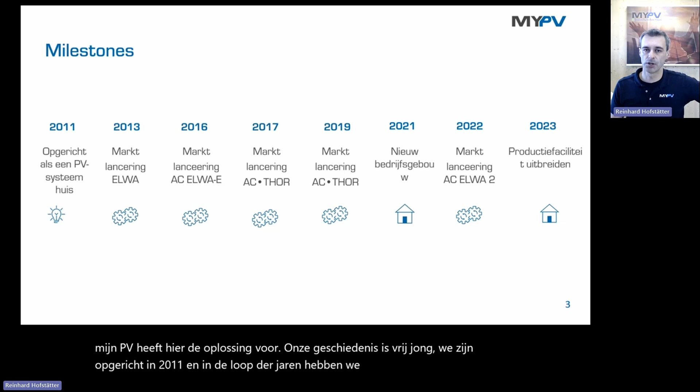Our history is pretty young. We were founded in 2011, and over the years we have developed a number of different solutions. It all began with a DC solution named ELWA. The abbreviation just means electric water heater, and still until today it's in our portfolio with hardly any changes on the product itself. It's a DC solution, and it's the only DC solution we have.

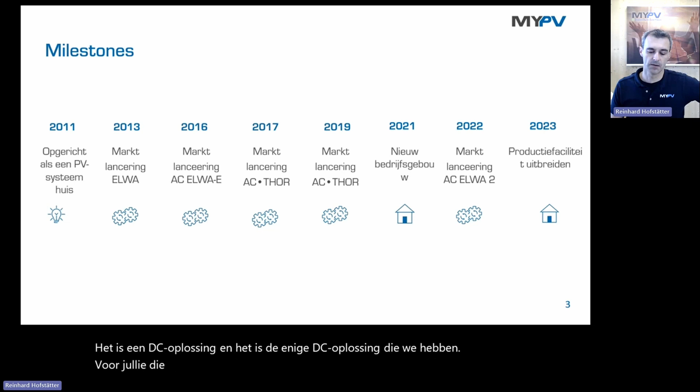For you guys working with SMA home manager systems, it's relevant what we have in our portfolio to be combined with AC power systems. And there are several solutions. At this point today, we are talking about 2 variants that can be combined with SMA.

This is our headquarter in Austria. We built it in the year 2021. During the last 2 years, it's already too small again, so we expand our production area by a factor of 3 this year to meet the demand of the market, because power to heat for residential applications has become very important, especially since the war in Ukraine.

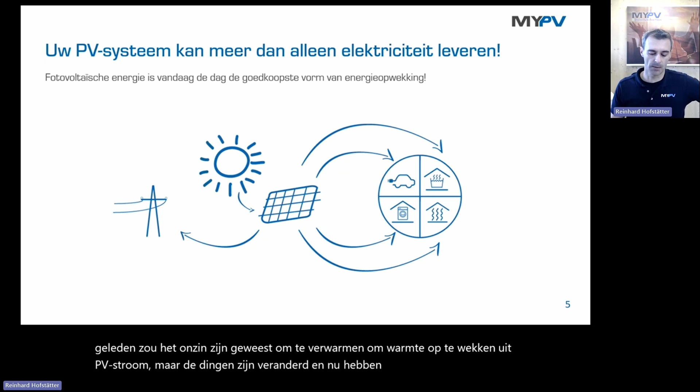What we are doing is possible due to the fact that PV has become that cheap. 10 years ago, it would have been nonsense to create heat from PV power, but things have changed. And now we are talking about power to heat or sector coupling, and there are several words that are in use for what we do.

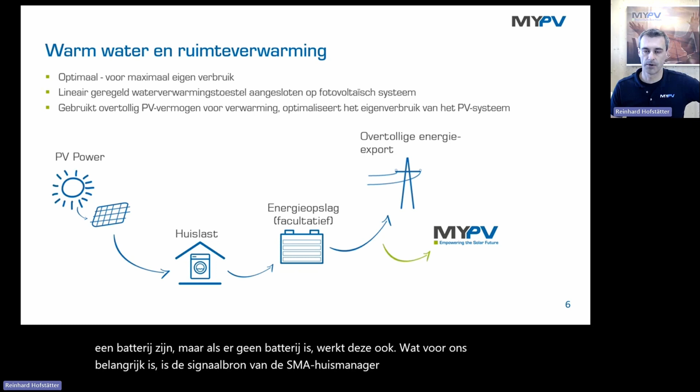What power do we need when we are talking about the combination with SMA in on-grid systems? It's all about the excessive power, so we utilize the power that would be fed back into the power grid. There can be a battery, but if there is no battery, it works as well. What is important for us is the signal source of the SMA home manager, or alternatively, the SMA energy meter. Both things are possible, each variant has its advantages.

Let's take a short look and talk about storage capacities. When we are installing a stationary battery system in a residential building, the capacity is around 5 to 10 kilowatt hours, and this means an investment for the people. Alternatively, we can use the hot water boiler which is already in the building, and we can make use of this boiler for increasing the self-consumption by a MyPV solution.

So we can be both. We can be a cheap alternative to a stationary battery, but we do not compete with stationary battery, it can be used in combination as well. And that's the cool thing about the combination with Home Manager - you choose whether there is a battery or not, for us it does not make any difference.

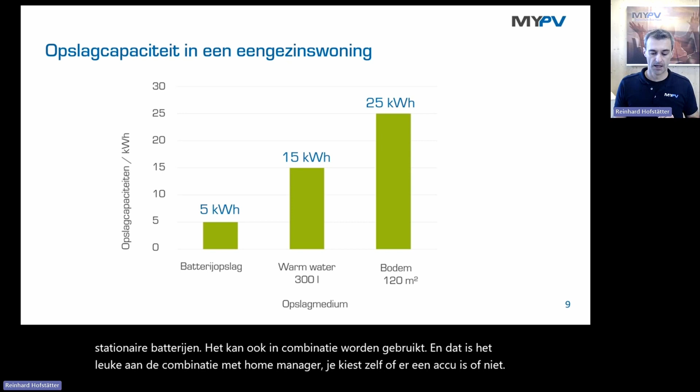There are three main products in our portfolio. This one at the top here is ELWA, which is the DC solution, it has no direct relevance for SMA. So we continue talking about our on-grid AC solutions, which means AC ELWA 2 and AC THOR.

What is the difference? Both solutions are power stages, both have the electronics to adjust the power output on an electric heating element. The advantage of AC ELWA 2 is that the heating rod, the immersion heater which is inside either the hot water boiler or the storage tank, comes with the device in the box. So it's an all-in solution, a combined solution, and it's very attractive when you make an offer to the customer because you have an all-in-one solution. Advantage of AC THOR is that there is not an immersion heater included, which makes you much more flexible.

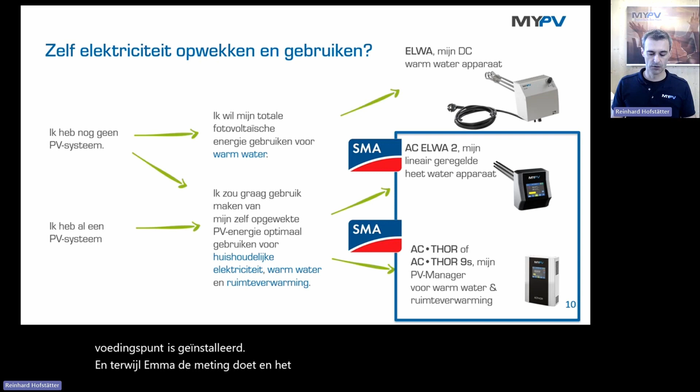You can retrofit an existing immersion heater with AC THOR, and then it's PV ready later on. Both devices get the commands, the orders of what to do and how much power needs to be released to the water from SMA. So you save on an additional device from MyPV, which is an energy meter that we normally install in the feed-in point. You don't need this device because SMA is installed in the feed-in point, and SMA does the metering and detects the excessive power, which is what we need to adjust the power output.

So when you are on the grid, you have two options. You can use it with SMA Home Manager or with SMA Energy Meter. With SMA Energy Meter, you have just one option to control our device: we directly get the meter value from the energy meter and adjust the power output accordingly.

When we are connected to Home Manager, you have two options. Either the energy management of MyPV is done by the Home Manager, or we do it the other way: we get the meter value from the SMA Home Manager, and then we do the energy management of the heater by MyPV ourselves. Otherwise, it's done by Home Manager.

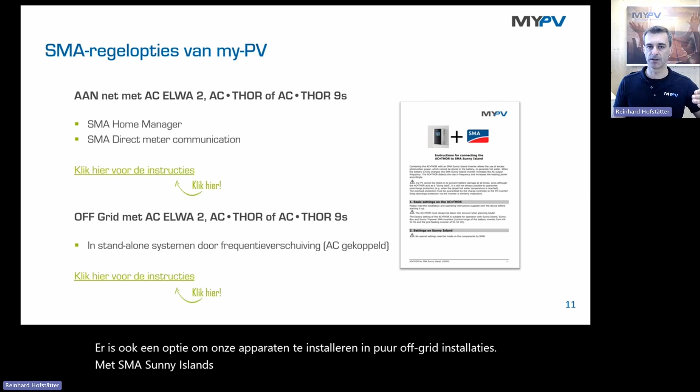There is also an option to install our devices in purely off-grid installations with SMA Sunny Island systems. It is possible to give the power set point to MyPV by the AC frequency. This is a very special application. We're not going to talk any longer about this, but it's a very cool feature for off-grid systems.

Back to the on-grid systems, this is what I meant before. When we are controlled by the SMA Home Manager, the logic, the intelligence is within the SMA Home Manager. We are just doing what SMA tells us to do. When we get the meter value instead, the logic is on our side.

Both variants have their advantages. When we are controlled by SMA Home Manager, the advantage is that we are within the Home Manager's energy management. We are also shown in the charts of the SMA portal. This is a very cool advantage.

The advantage of direct meter communication is that we adjust the power output much faster. Once a second we adjust the power output, very fast and very accurate. So both variants are widely used.

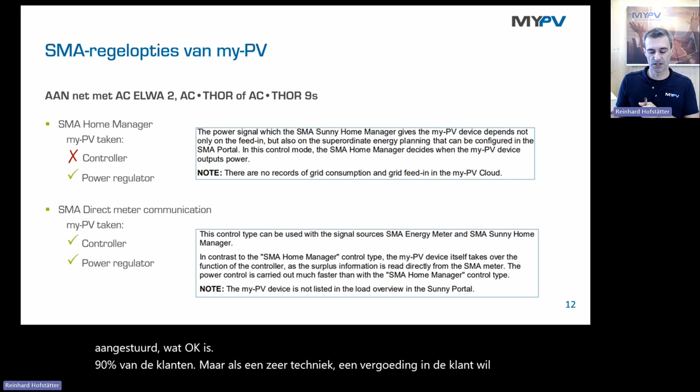It's up to the operator, the owner of the system, to choose whether he wants to be visualized in the SMA Home Manager, where we are controlled once per minute, which is okay for 90% of customers. But if a very tech-affine customer wants very fast power control, he changes over to SMA direct meter communication. Both variants are very well proven and in use out there.

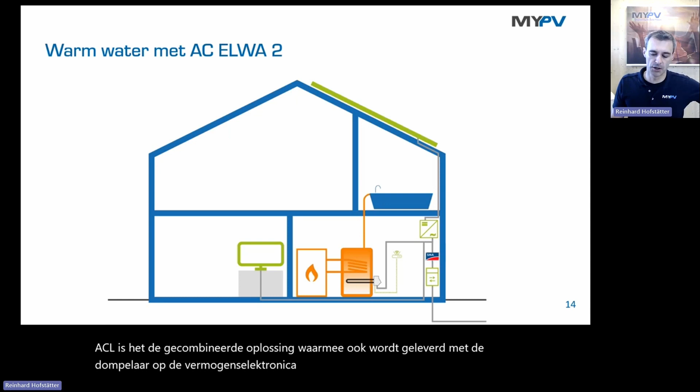AC ELWA 2 is the combined solution, which also comes with the immersion heater on the power electronics. Again, the signal source is SMA, either the Home Manager or the energy meter installed in the feed-in point. Depending on the control variant you choose, we are working fast or very fast.

So why is it so important to adjust the power output here on the immersion heater? Actually, you have two things that are changing all the time. Number one, the power output of the inverter changes all the time—the irradiation of the sun is not constant and clouds are moving across the sky. The other thing that changes permanently are the loads in the building: something is always switched on and off, the lights, the devices, washing machine, whatever.

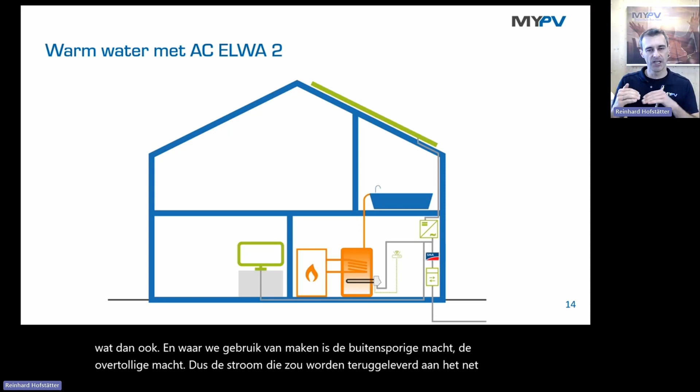What we make use of is the excessive power, the surplus power—the power that would be fed back into the grid is what we use. This is a balance, and we keep the balance by adjusting the power output here.

AC ELWA 2 is the next version of a product named AC ELWA E. I think Anne has an AC ELWA E in her academy, and it's already replaced by the newer generation AC ELWA 2. It has many advantages: we have more power output here, it's a 3.5 kilowatt device, while AC ELWA E was only a 3 kilowatt device.

We have a touch display there. We have the option to be connected with SMA either via LAN, local area network, via patch cable, or Wi-Fi—the installer chooses what he makes use of. Actually, I see that most of the devices are installed somewhere in the basement of the building, and it's up to the quality of the Wi-Fi whether it works well or not.

So we always make sure to keep the option of a local area LAN connection via patch cable. A hard wiring is a hard wiring, but you choose. And then we have a separation here of the professions of the craftsmen.

A problem with AC ELWA E was that the plumber was not sure if he is responsible, and the electrician was not sure if he is responsible. That's why we separated the components here. Both components come in one box. As I said, it's an all-in combined solution, but the heating element can be installed in the tank separately and independent from the power electronics. Usually the electrician connects the electronics and also installs the communication with SMA.

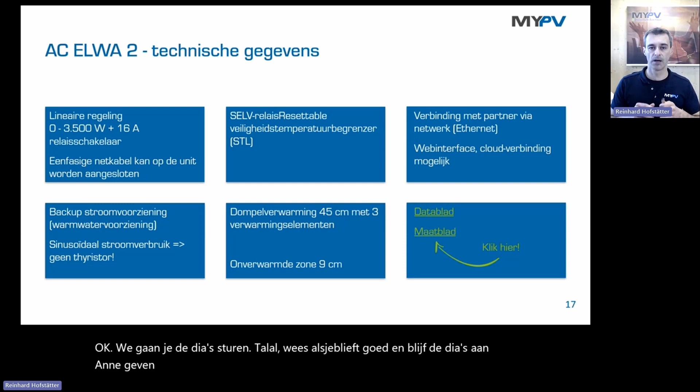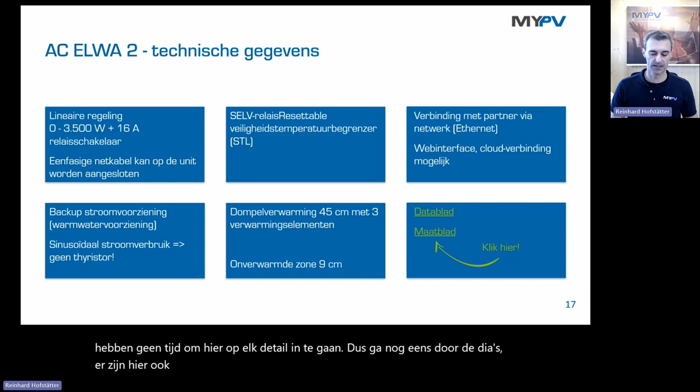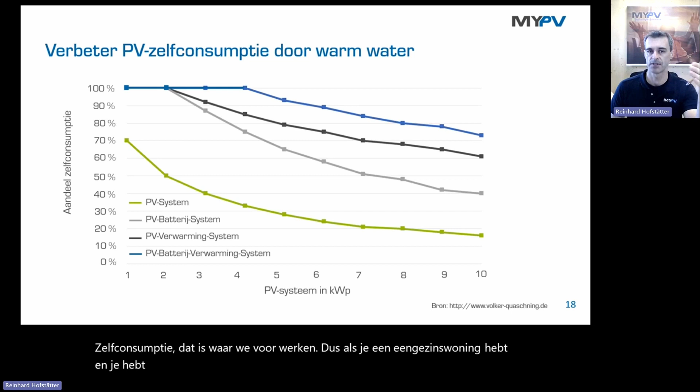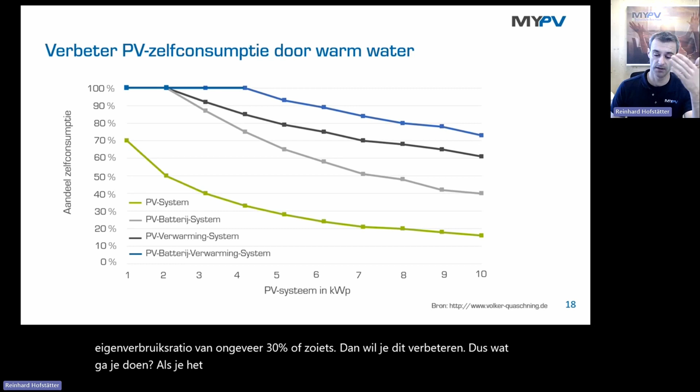Self-consumption - this is what we are working for. When you have a single family home and a 5 kilowatt peak system on the roof, you have a self-consumption ratio of around 30% or something. Then you want to improve this. So what are you going to do? If you have the money, you install a stationary battery and really increase the self-consumption ratio by a factor of 2, to more than 60%. Great chance to improve your system.

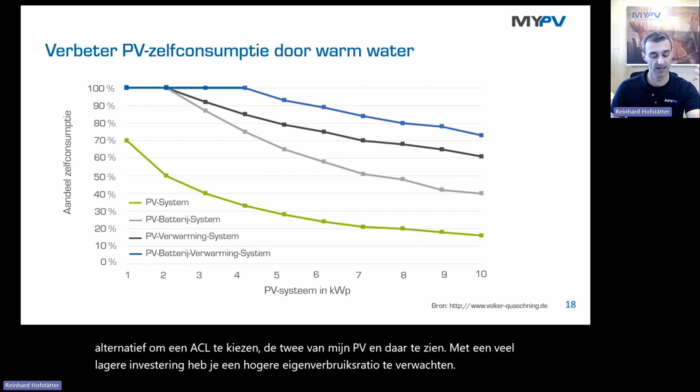If you do not have the money to install a stationary battery, you have the alternative to choose an AC ELWA 2 from MyPV. With much lower investment, you have a higher self-consumption ratio to expect. And we are not competing with batteries - the best way is to have both systems. Then you achieve a self-consumption ratio of more than 90% when we combine both technologies.

If there is a battery in your system, then priority is on the charging of the battery. Why? It's easy to explain, because once we have made heat out of the surplus power, we cannot get back electricity. We cannot reverse the laws of physics. So priority is on charging of the battery.

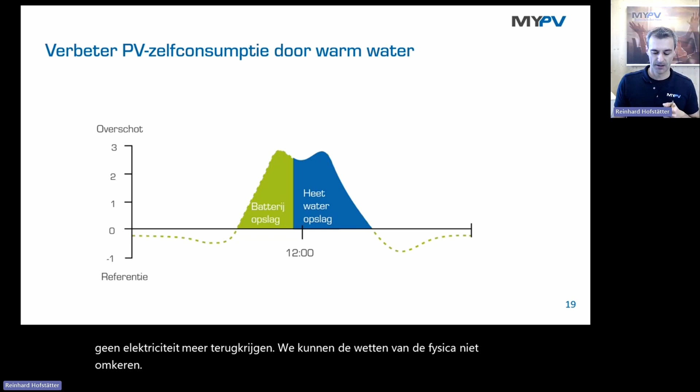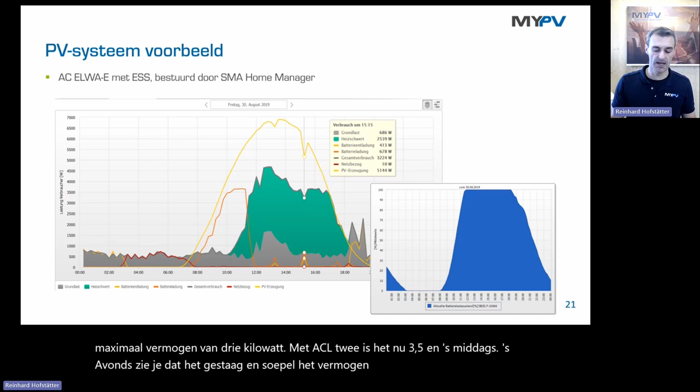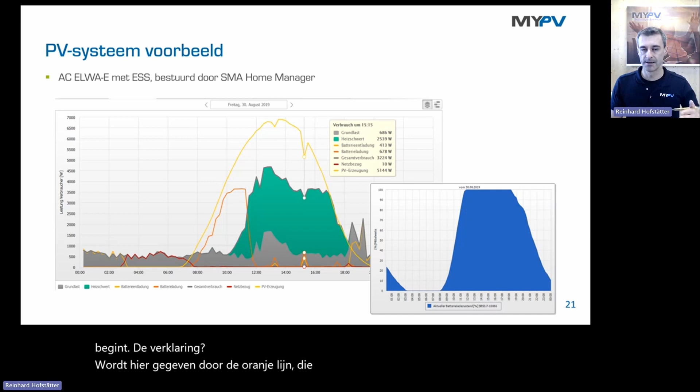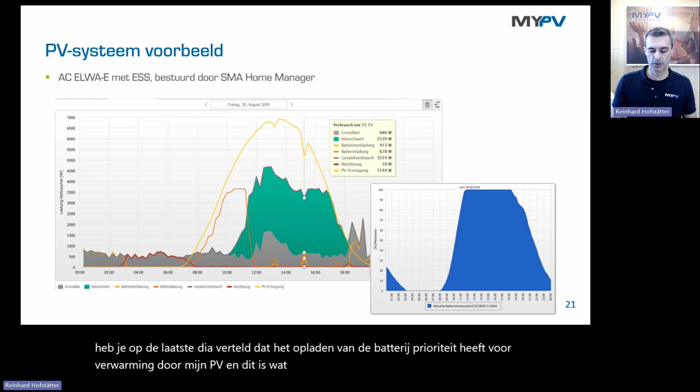Here you maybe ask why it starts so late. The explanation is given by the orange line here, which is the charging power of the battery. I have told you on the last slide, charging of the battery has priority before heating by MyPV, and this is what we see here. As soon as the SOC of the battery comes close to 100%, AC ELWA-E was fully used by the home manager.

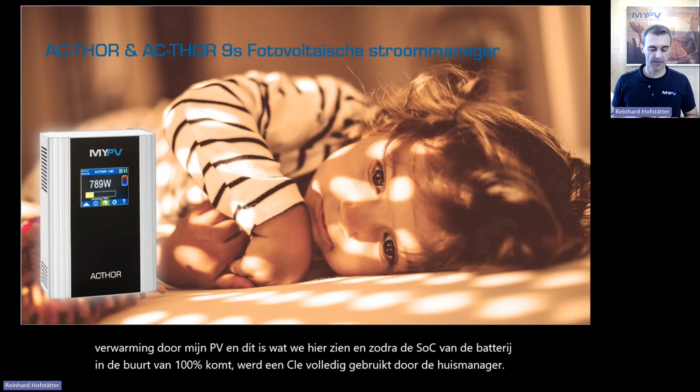All right, now it's about the AC THOR. It's basically also a power stage like AC ELWA 2, but it comes without an immersion heater. The advantage here is that it's much more flexible - you can retrofit an existing immersion heater, you can also use infrared panels or electric heating mats in the floor. With the AC THOR, these electric heating devices become PV ready, because this is now, let's say, the gearbox which we use before the electric heater to adjust the power output according to the surplus power.

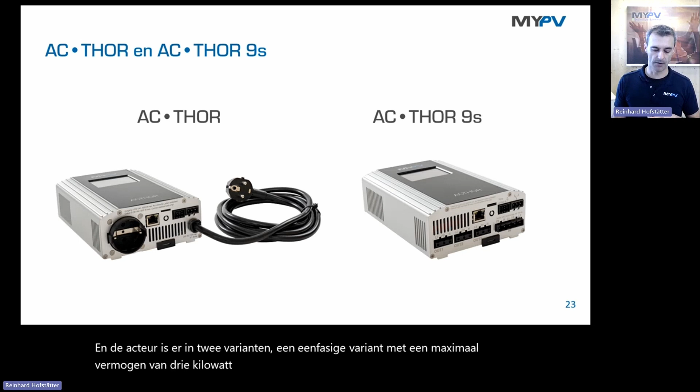The AC THOR comes in two variants: a single phase variant with 3 kilowatts maximum power output, and a three-phase variant with 9 kilowatts maximum power output. Here again, the technical details - I'm going to skip this slide.

One detail needs to be mentioned for the AC THOR 9s, the 9 kilowatt variant. If you use it for retrofitting on an existing immersion heater, then please check if there is a neutral conductor on the heater - this is essential. The AC THOR is not connected in the delta connection to the load, it's always necessary to have a star connection. Otherwise, the AC THOR cannot detect the nominal power of the load, because this is done automatically by the device.

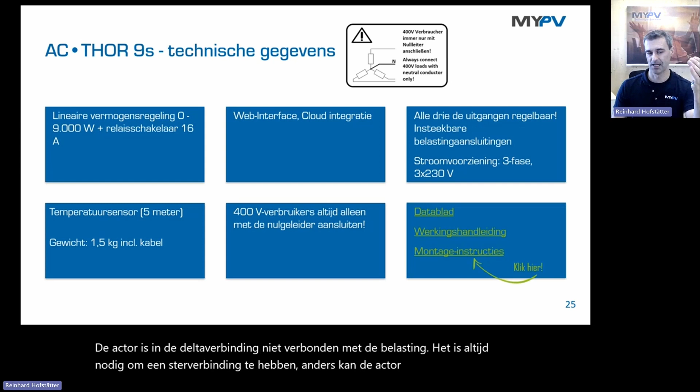So if you connect a 2 kilowatt heater to the single phase AC•THOR, you do not have to adjust anything - the device automatically knows how much nominal power is available. This also applies for the 9s - you can also use a 6 kilowatt heater instead of a 9 kilowatt heater, for example. But therefore, you always have to connect the neutral conductor. So please check this when you are using the device for retrofitting - this is very, very important.

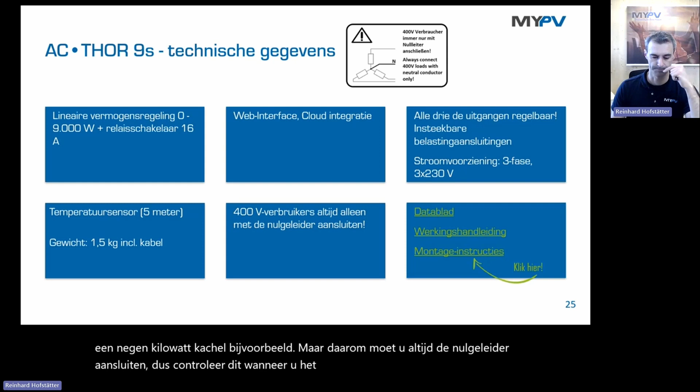All right, of course there are also accessory parts in our portfolio. Actually, the AC•THORs can be used with immersion heaters from third-party suppliers.

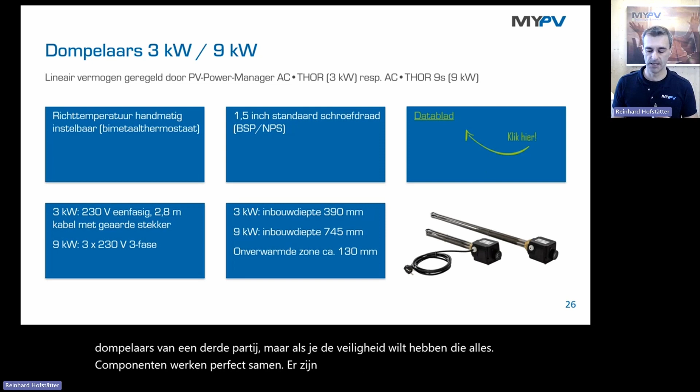But if you want to have the security that all components work together perfectly, there are accessory parts from MyPV as well: a single-phase 3 kilowatt heater and a three-phase 9 kilowatt heater for the AC•THOR 9s.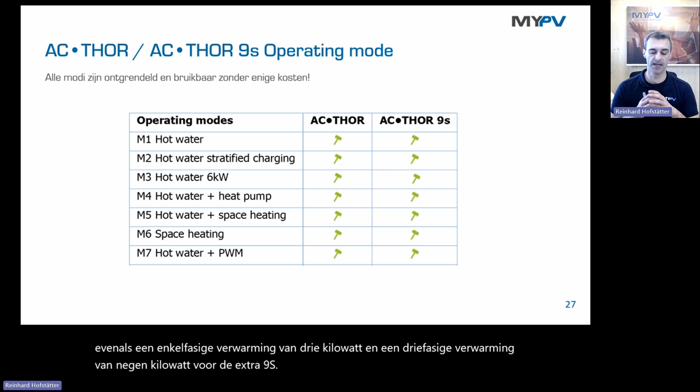When you pick out the devices from the box, they come with 7 operation modes, and these are somehow predefined templates, standard modes. Most of nearly every project can be done with one of these standard modes.

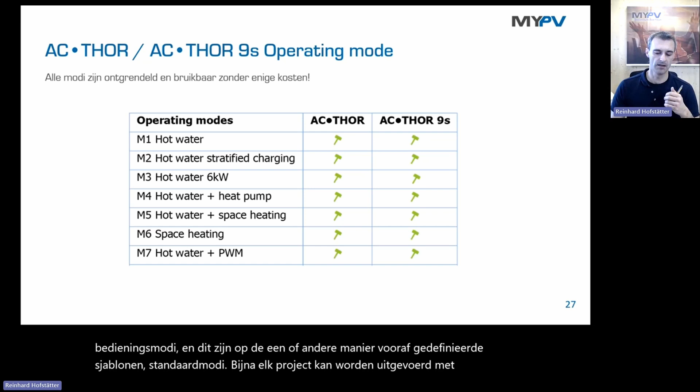The most important one, I think more than 90% of the devices are running in mode 1. And basically it does the same as AC ELWA 2. It's about an immersion heater somewhere either in the boiler or in the storage tank, where it also can boost your hydronic space heating system.

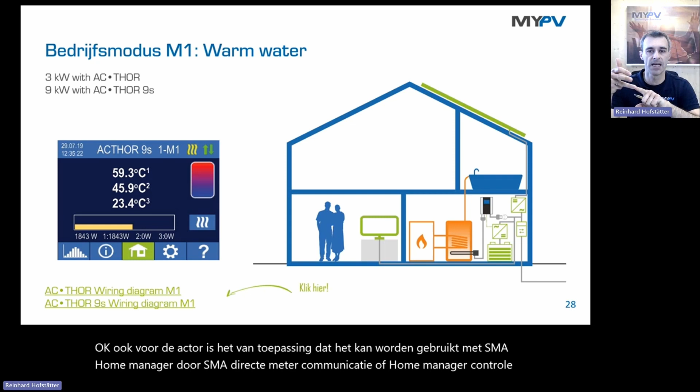Also for the AC•THOR, it applies that it can be used with SMA Home Manager by SMA direct meter communication or home manager control, and it also can be controlled or combined with SMA energy meter only. And also here it's an option to have a battery or not. Both ways are possible.

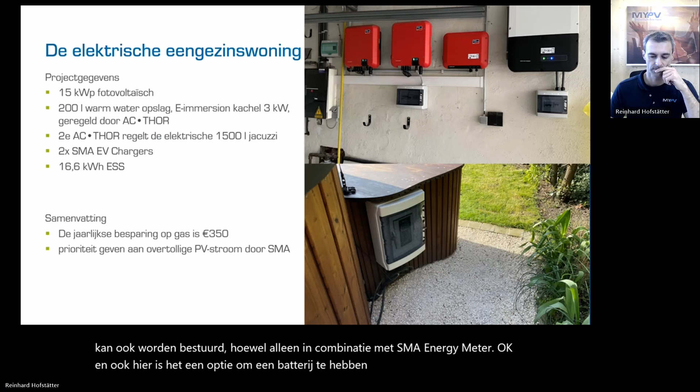There is already a reference project. In this system, we have two AC•THORs working actually, because the home manager can control several my-PV devices at once. And with this bar of the priority, the owner of the system chooses where he wants to have the priority, on the battery, on AC•THOR number 1 or AC•THOR number 2.

In this system, there is an AC•THOR used for the boiler heating. It's a 200-liter boiler with a 3 kilowatt immersion heater controlled by AC•THOR. And since a few weeks, as far as I know, there is also a second AC•THOR which is used to use the remaining surplus during summertime to heat the jacuzzi. So it's also a very luxurious example here.

And in this system, there is also a stationary battery installed with a capacity of more than 16 kilowatt hours. So a very great state-of-the-art system, and a very good-looking one with the jacuzzi in the garden here.

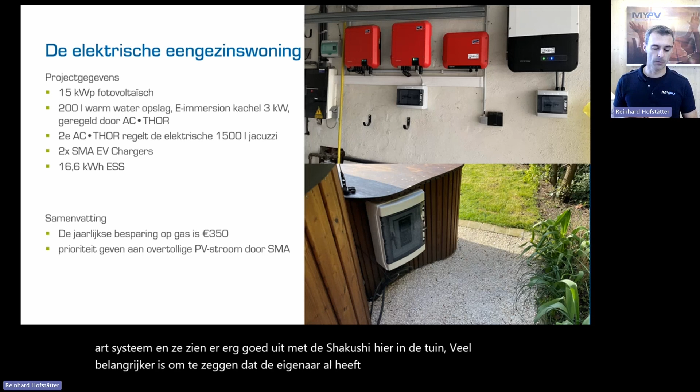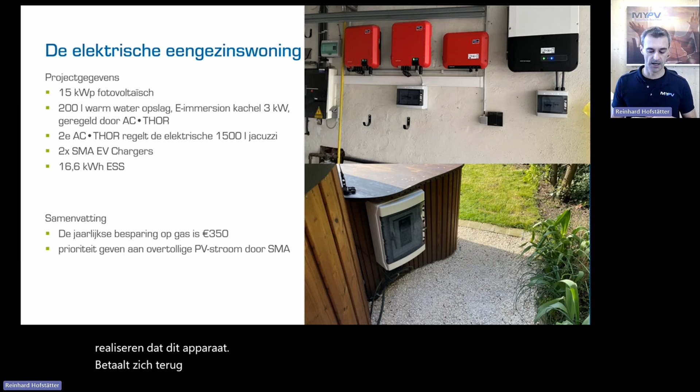Much more important is to say that the owner has already saved on gas costs of 350 euros. When you compare this with the investment costs in a single-phase AC•THOR, you will realize that this device pays off within 2 years or something. So very fast or very short time to pay off here. Very economical.

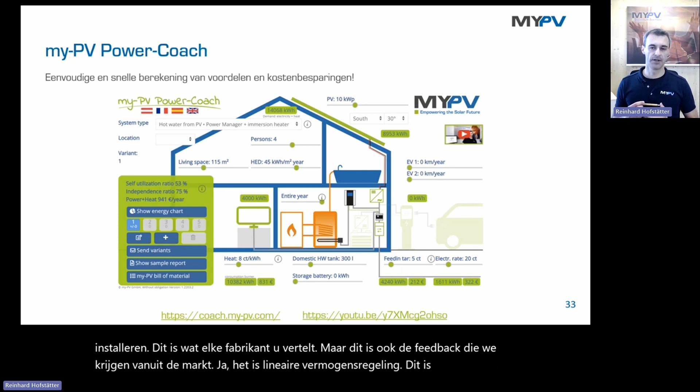Advantages of AC•THOR: of course, it's easy to install. This is what every manufacturer is telling you, but this is also the feedback that we get from the market. It's linear power control. This is the most important thing that I want to tell you. When you create heat out of surplus power, you always need linear power control. And this is our core know-how as a manufacturer.

You probably want to calculate or plan a system on your own, and therefore there is an online tool on our website. It's called my-PV Power-Coach, and here you can do a planning by yourself. So you adjust, you choose a location. There are also locations available in the Benelux countries.

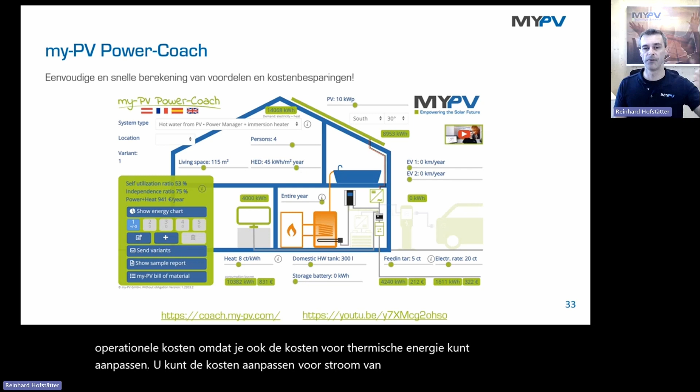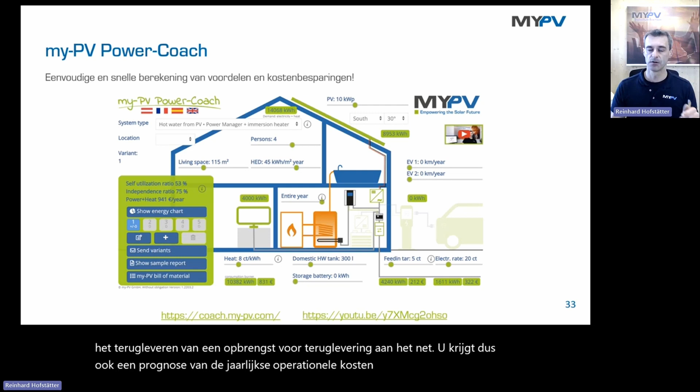You set up the configuration of your PV array, your system, and then you can calculate things like a self-utilization ratio, independency ratio, and you also get a forecast of the operational costs, because you can also adjust costs for thermal energy. You can adjust costs for power from the grid, but also a revenue for feeding into the grid. So you get a forecast of annual operational costs as well, and you can set up here up to 5 variants to compare different options with each other.

Advantages: of course, what is so essential? The key thing is that these storage capacities we need are already there where our customers are living. So they already have a hot water boiler or a storage tank, and we can use these existing storage capacities to improve their self-consumption ratio. And this is where we have developed the solutions for.

And it's again all about linear power control. So please forget each control system that just switches something. When an electric heater, an immersion heater in the tank, is switched on and off, then it has nothing to do with PV readiness. So forget about it, please. It's about adjusting the power output according to the changing surplus power. This is what we do.

We have a very well-developed sales and distribution network in Austria, of course, Germany and Switzerland. And thanks to Talal, this is also on the increase in the Benelux countries. If you are going to look for a distributor in your area, please check our website here or get in touch with Talal directly. He's going to help you and give you the information you need.

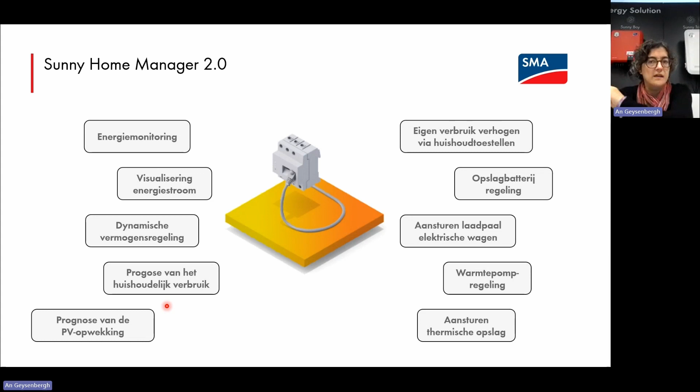Dus we gaan niet zomaar zeggen, oh, we hebben energie, hoppakee, we gaan het warmte-element in gang zetten. Nee, we gaan echt bewust kiezen van, we gaan inplannen en we gaan echt kijken van, oké, als een toestel aanspringt, zeker als het een kan-verbruiker is, kom ik zo dadelijk op terug, dat die uit de zon gaat.

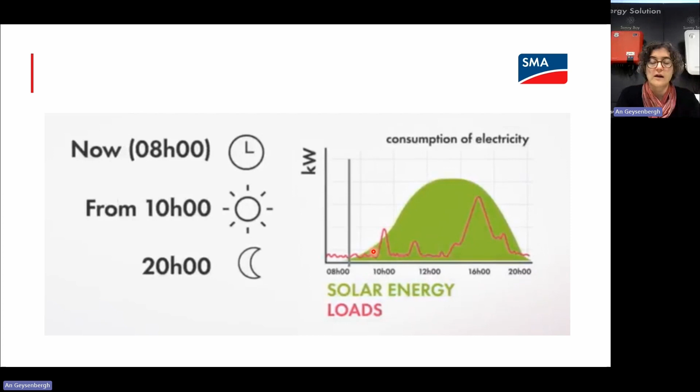Nu, die kan-verbruiker, moet-verbruiker, wat is het allemaal? Dat zie je hier een beetje weergegeven. Moet-verbruiker is, de klant wil graag dat tegen het einde van de dag, of tegen wanneer hij het eindstip legt, dat die bepaalde verbruiker zijn elektriciteit heeft gekregen. Uiteraard gaan wij focussen voor elektriciteit vanuit de zon te krijgen. Is er te weinig voorradig vanuit de zon, dan zal hem dat uit de batterij nemen, als er een batterijsysteem is. En tenslotte vanuit het net. Dus het net is de laatste speler die meedoet, in eerste instantie zoveel mogelijk uit de zon.

Hier begrijp je al, als die verbruiker wordt geactiveerd, bijvoorbeeld dat ik zeg via mijn SMA Energy app, ik wil vandaag dat mijn wagen geladen is tegen 5 uur met zoveel extra kilowattuur. Als ik dat ingeef, dan heb ik eigenlijk aan het systeem meegegeven, jij moet dat vandaag doen. Dus we proberen natuurlijk voor de eindklant het zo gemakkelijk mogelijk te maken, zo intuïtief mogelijk te maken van, ah ja, ik wil wegrijden, tegen dan klaar. Wat het er allemaal achter zit van filosofie in een home manager, hoeft hij zich niks van aan te trekken. We gaan het 1 keer programmeren. Dat leer ik ook in de SMA Solar Academy aan jou. En dan is dat klaar.

Dat zijn de moet-verbruikers. Maar je hebt uiteraard ook kan-verbruikers. Kan-verbruiker is de bedoeling dat jij die energie die op overschot is, dat je die gaat gebruiken, maar nooit in die danige mate dat je ook vanuit het net gaat energie gebruiken. Een voorbeeld, onze boiler. Ik weet niet wat het minimum tijdspanne is dat...

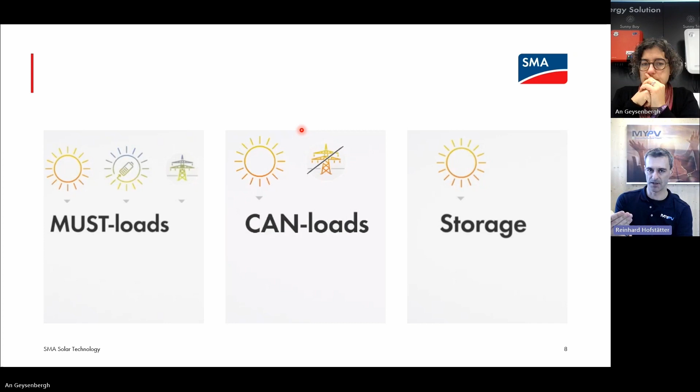We would be able to do the gaps in between too, and that's why very often our customers change the other option, which means direct meter communication. Then we do each watt in between. The disadvantage here is that we cannot be seen in the Home Manager charts, so it's up to the customer to choose. Okay, clear, thank you for the information.

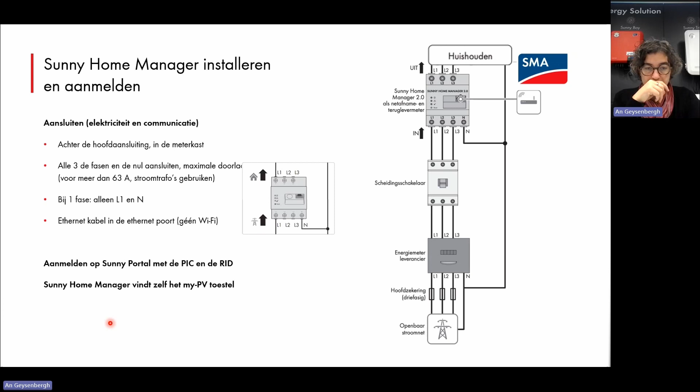Ik neem even een Sunny Portal installatie erbij. Ik heb kort een installatie aangemaakt met een koppeling naar MyPV. Die heb ik niet. Ik heb hem wel hier liggen, maar ik heb hem niet aangesloten.

Maar dus belangrijk is, als je de Sunny Home Manager online plaatst en er komt jouw omvormer bij, kan je hier zien. Dus je hebt je Home Manager en je hebt je omvormer. Dat je daar gaat ingeven welke panelen of in welke richting dat de panelen staan voor onze omvormer.

Dus een van de zaken die ik zeker wil meegeven als je gaat werken met de SMA Home Energy Solution, is dat je zorgt dat de Home Manager perfect weet hoe de panelen staan. Want hoe accurater dit is, hoe duidelijker of hoe correcter de weersvoorspelling doorkomt.

Hoe doe je dat? Wel, bij de STP of bij de omvormer zelf ga je naar eigenschappen. En dan kan je, als je op bewerken klikt, zie je hier, strings gaan toevoegen. Je kan daar de fabrikant ingeven, het moduletype, maakt niet zo heel veel uit. Maar je kan dan ook aangeven, oké, hier liggen panelen van bijvoorbeeld 450 watt.

Het zijn dan, weet ik veel, 10 panelen die naar het oosten liggen bijvoorbeeld. En onder een hellingshoek van 20 graden, ik noem maar iets. Dat is dan een eerste string die eraan gekoppeld is. Ik kan nog een string toevoegen. Misschien zijn er nog eens...

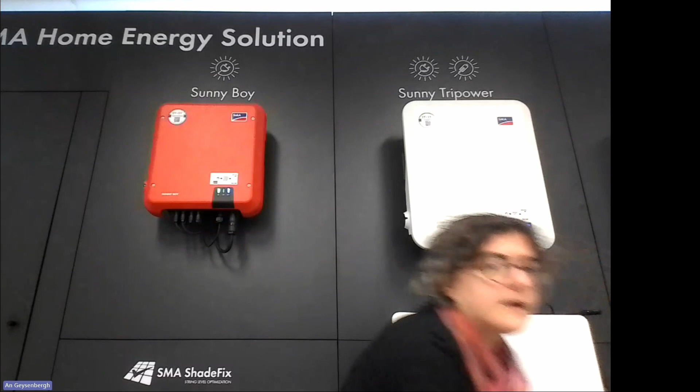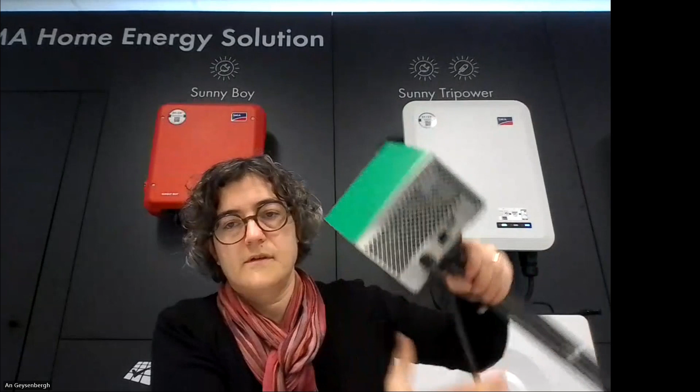Wat je hier waarschijnlijk ziet is een instelling op hoeveel graden dat die mag verwarmen. En aan de onderzijde zie je hier, heb je enerzijds jouw gewone aansluiting voor de voeding en jouw Ethernet-aansluiting.

Question for you, Reinhard: is it a similar connection you have on the new ELWA 2? It is similar, but we have much more other connection ports. You can have Wi-Fi, as I mentioned, but we kept the RJ45 LAN socket because it's so important to have a reliable connection, much more reliable than Wi-Fi.

And for other options with other signal sources than SMA, there's also an RS485 interface on AC ELWA 2. There is also a PWM interface on AC ELWA 2 because some other smart home manufacturers give us a PWM signal. So the bottom side is different, but it does not make any difference for SMA combinations when we look at AC ELWA-E, except the option that there is Wi-Fi as well.

Yeah, and is this also similar on the new one? No, we get rid of this mechanical part. This rotation knob is used to adjust the set point temperature that you want to achieve with surplus power in the tank. Now we have a color touch display on the device, and you do the setting on the touch screen. So one mechanical part less, and this has advantages for the reliability of the product itself. Okay, thank you.